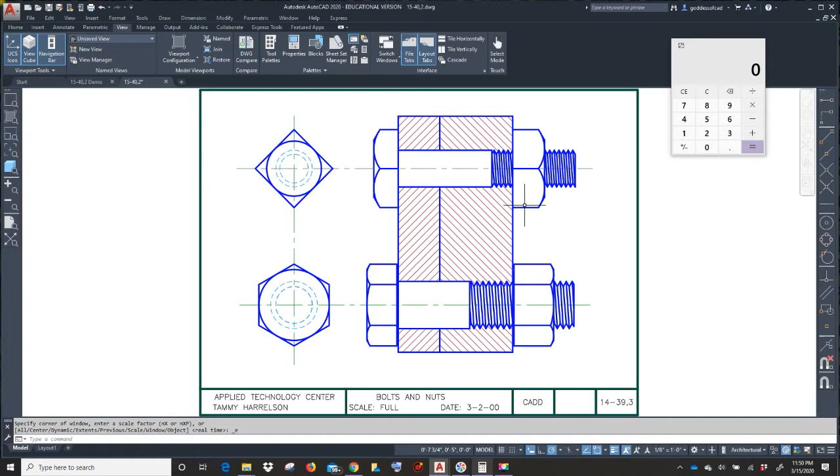Okay, this is the finished product. We're going to have to figure out the sizes, and we're going to have to figure out the different ways to create the bolt heads, the square and the hex, and we have the thread here, and the nut on the end. So we've got to do a few things with that.

We'll have a chamfer involved. We'll also have this small neck that we have to add because this is going to be a heavy hex bolt, and we will have to figure out the length of the threaded shaft and switching the angles of the hatch, because this is two separate pieces of material being bolted together.

So take a moment and get these things drawn into your drawing, and go into save and save it as 15-40 number 2. So this is our nuts and our bolts.

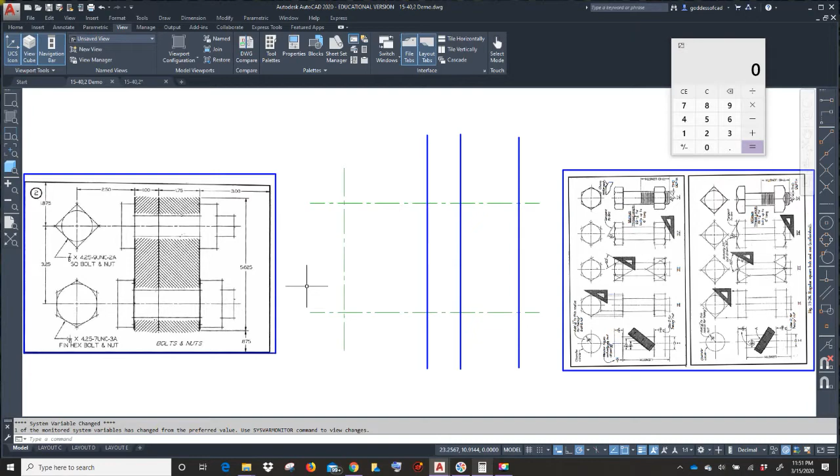Okay, what we've got to look at first is what we have going on our screen here. What is on our paper? We have a square bolt and a hex bolt.

With the square bolt, it is a 7/8, 4.25, 9 UNC 2A. So the major diameter is 7/8. The length of the bolt is 4.25, from here to the end of the bolt. It is a 9 UNC 2A thread, so there are 9 threads per inch, and the pitch would be 1/9. So the pitch of this thread is 1/9.

We have a 1 1/8, 4.25, 7 UNC 3A thread. So for this bolt, the major diameter is 1 1/8, the length of the bolt is 4.25, the number of threads per inch is 7, and the pitch would be 1/7.

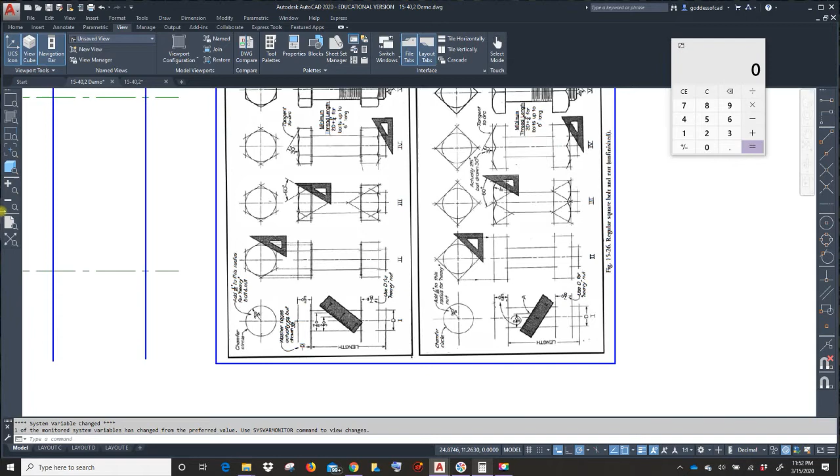Once we know those things, we need to come over to our cheat sheet and look at what we need to know. I know this is kind of upside down, but I wanted to orient the sheet in the same way that the bolt we're actually making is, so that's why it's laid on its side.

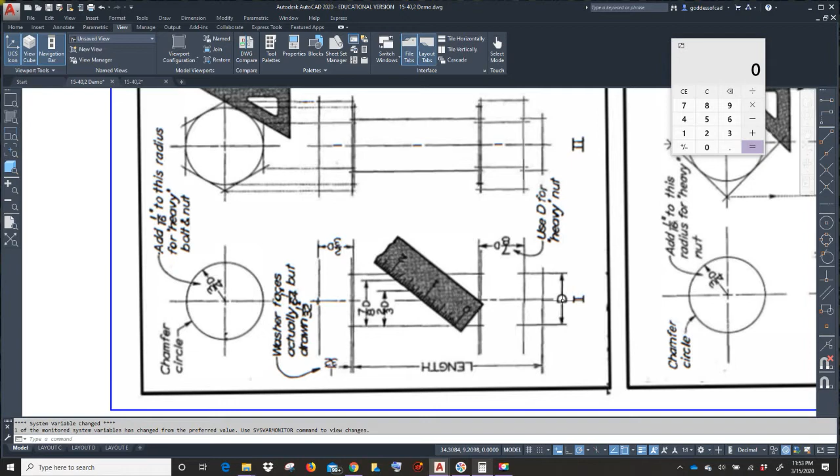We need to find our chamfer circle, which is 3/4 times D. D is our major diameter. So the major diameter of our first square bolt was what? Remember, we've got to look over here—major diameter is 7/8. So we take that 7/8 and multiply it by 3/4 in order to get this circle distance. To get the height of the bolt head, that's 2/3 D, so 2/3 times 7/8.

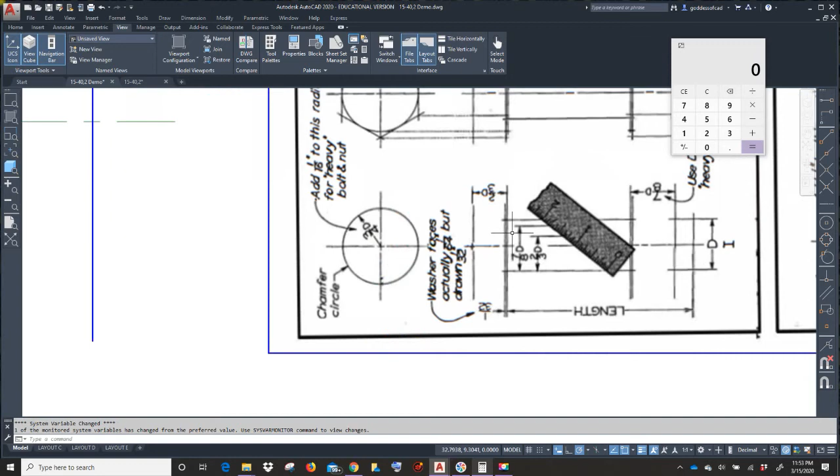So you can see when we're using this to make the different bolts, the square or the hex, you've got different measurements that you have to use to create them.

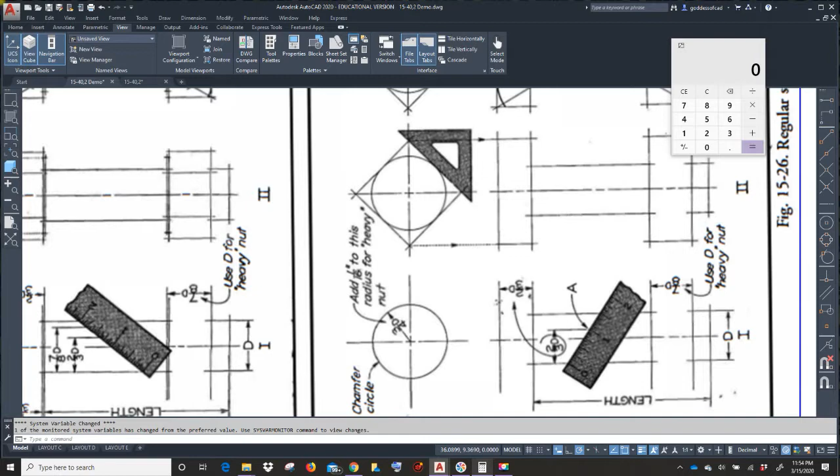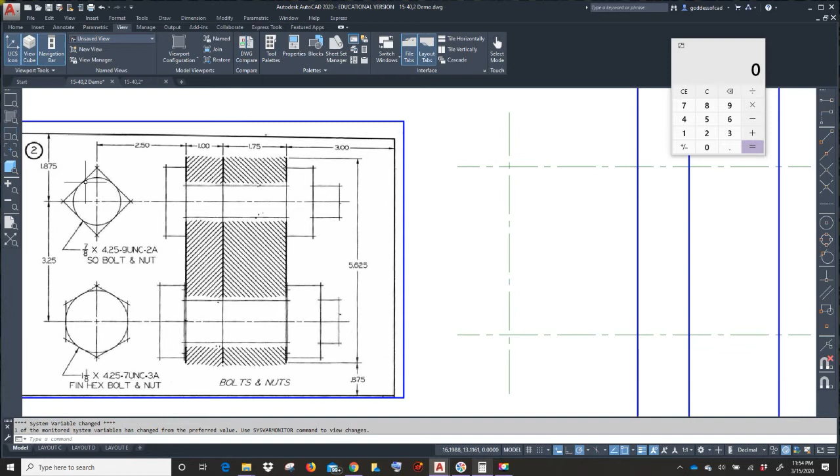Okay, so first things first, we're going to take 7/8 times 3/4 to get our square bolt chamfer circle right there. So you're going to take 7/8 times 3/4, so 0.65625. I'm going to clear that out and do it one more time to make sure I didn't have anything funky in my calculator. 0.65625.

So what you'll do, that is the radius of that circle. You're going to go to radius circle, pick your center point, put in your radius, and that is going to be that object circle. I'm going to change my current layer to object because it wasn't on object before.

Now I need to put that square around my chamfer circle. So I'm going to go down to my polar and set that to 45, so when I use my polygon command, it's going to snap in the right position. I'm going to go to polygon—it is 4 sides, there is the center, it is circumscribed. And I want it to snap to the 45 to the edge of that circle. Now we have the chamfer circle and the outside of my square bolt.

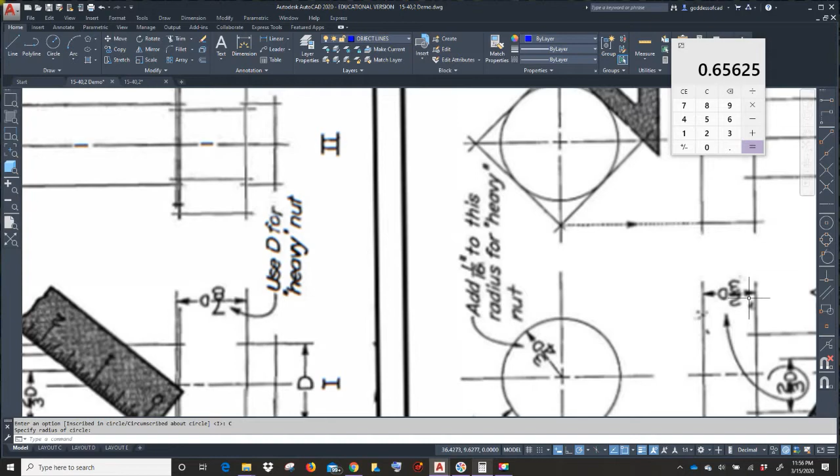Okay, so at this point, here's my square bolt. This is what I'm creating. I need this distance, so to get that distance, I take 2/3 times D.

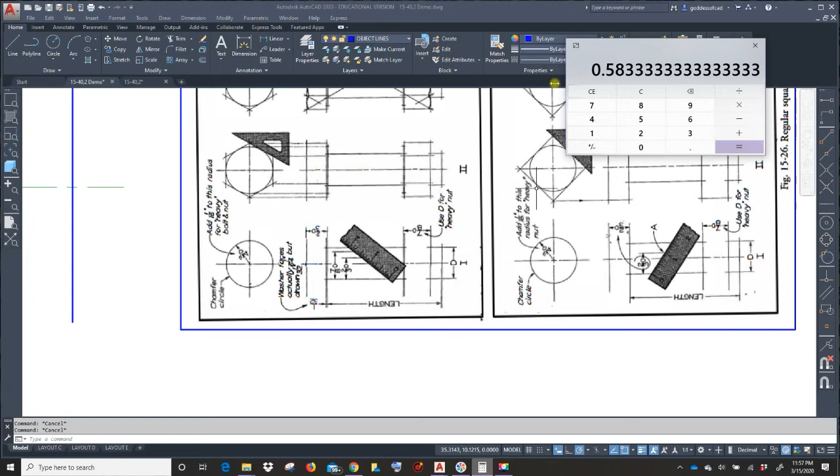So 2/3 times 0.875, and of course we are going to shorten that up, so we're just going to use 0.583.

So we're going to offset 0.583 from here to here. Then we're going to pull over the top of the bolt, the bottom of the square bolt head, and then I'm going to trim that away.

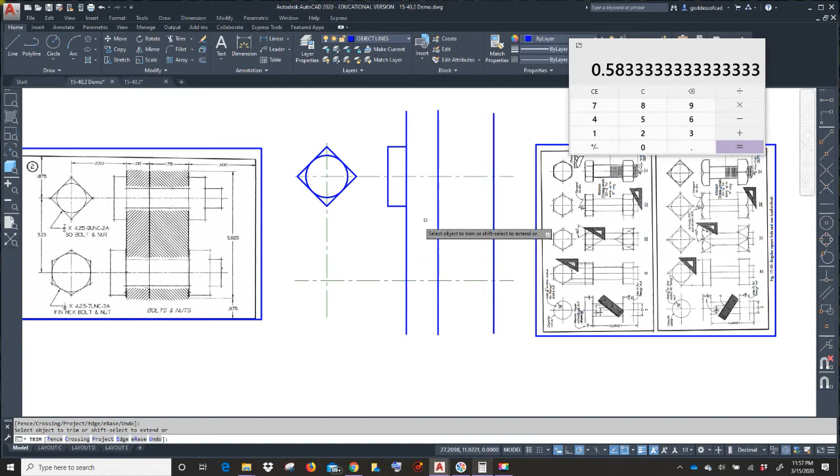Okay, now the major diameter of this thread is 7/8, so my major diameter divided by 2 is 7/16.

So now I've offset that up and down. I'm not going to change this to an object line quite yet, just because I know that I'm going to have to construct a thread in part of that.

So now I'm going to get the end of the bolt, which the length of this bolt is 4.25. So I'm going to offset 4.25 from here to here.

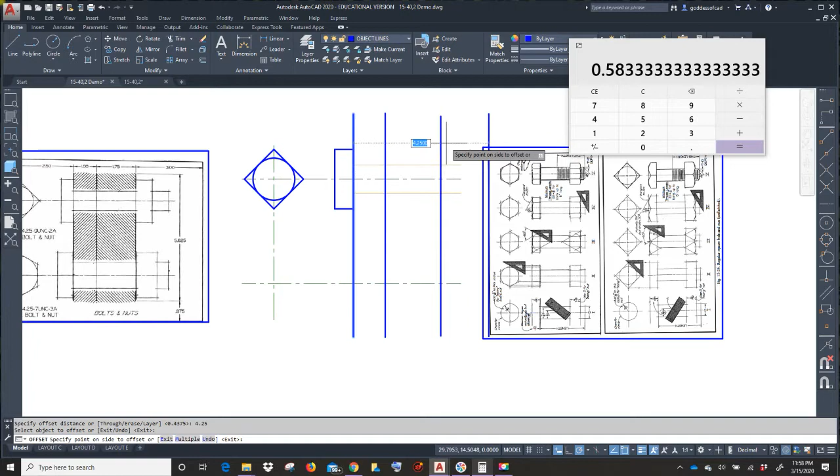Let me move my little picture over because I know that it is in the way now. Okay, I'm going to extend out to get the bolt, and I'm going to trim away what I do not need.

Okay, so I'm going to hit save at this point.

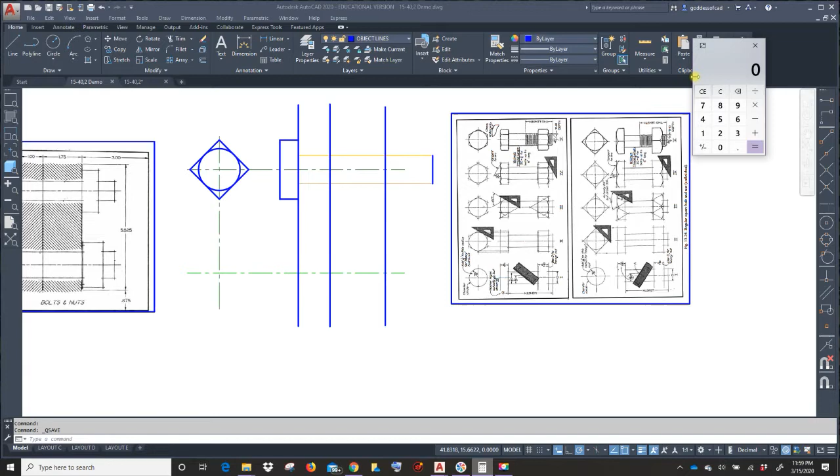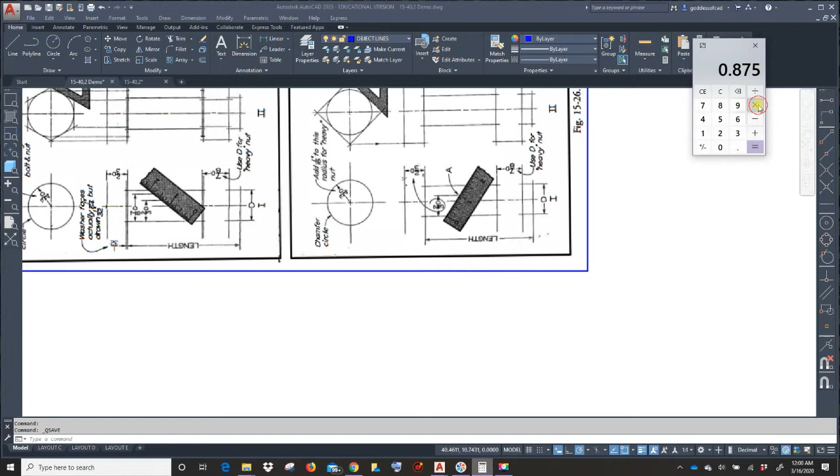So now what I need to do is get the size of the nut that is going onto that bolt. So 7/8 times D. Well, D is 7/8. So it's going to be 7/8 times 7/8, so 0.875 times 0.875.

Alright, so there's our distance. Sorry, I'm having to move it around so much. But now we're going to offset 0.765 from here to here.

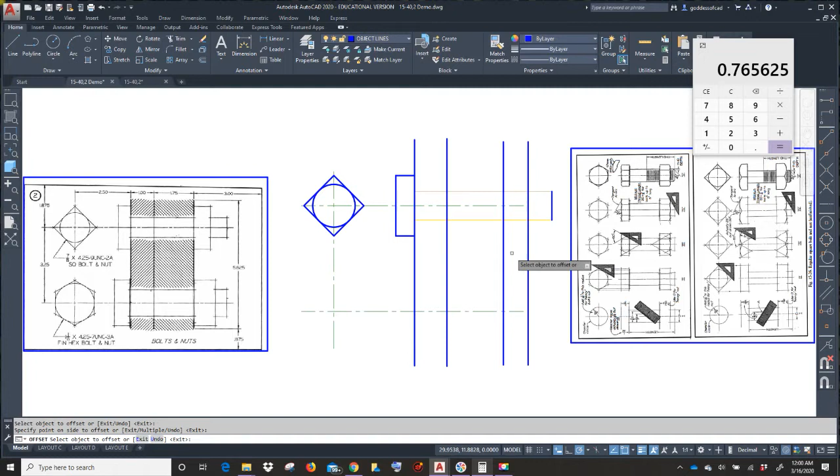You're going to pull over the same distance. And then you're going to trim off your extra.

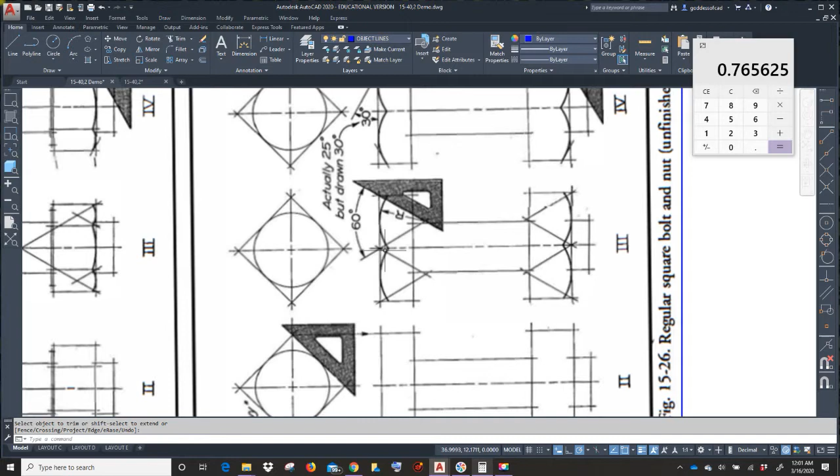Now, so we have the bolt head, we have the nut for the bolt, so now we need to create what they're going to look like. So if you see with our picture, we're going to have to create some arcs, and then we're going to have to create some chamfers. And then we will trim it out, and then we'll use our thread depth distance to understand how long that needs to be. Okay, so first things first.

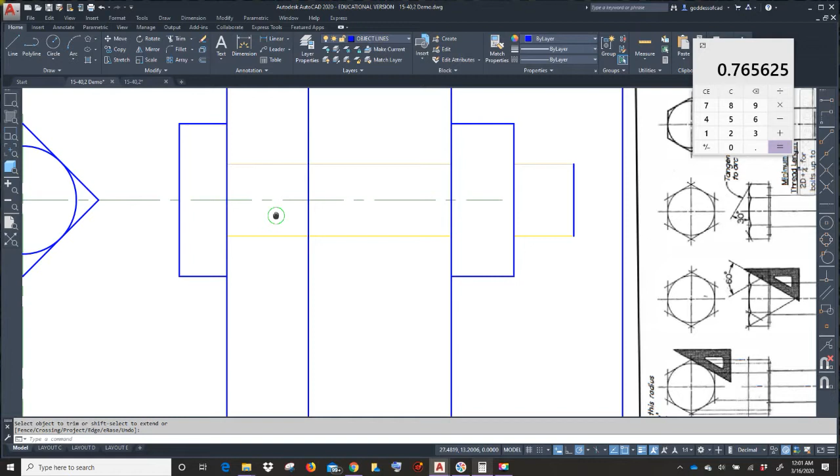Let's go ahead and pull over our object line for that thread.

Now, we need to go back to polar, and we need to set that to 30 degrees because these angles are going to form a 60. So what you're going to do is you're going to grab the corner and let this snap at 30-degree angles.

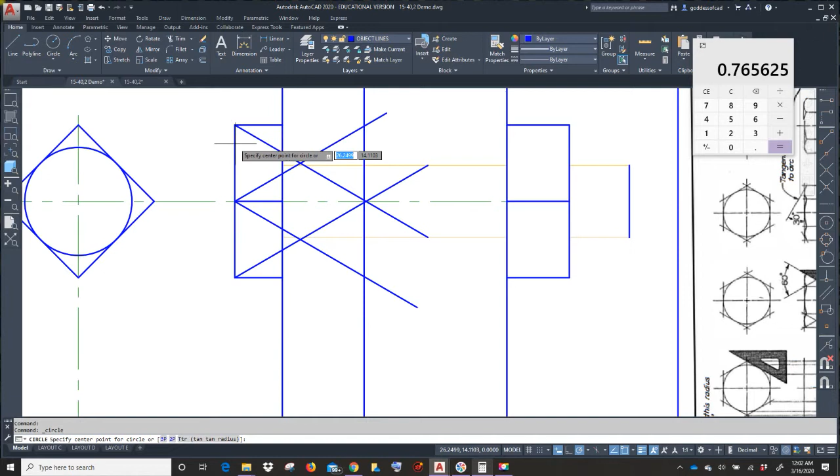Okay, so that's going to give you intersections at which to place your center point to get those curves. You're going to go to circle, center radius, and you're going to pick the intersection. Now be careful, make sure you've zoomed in and you're not picking the intersection of your major diameter. I want you to pick the intersection of those 30-degree angles. Click, and then drag it out to the edge.

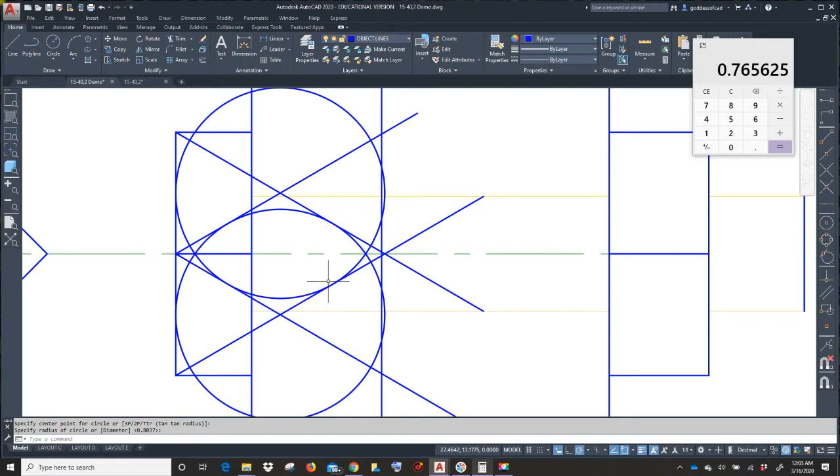Go to circle, click, drag it out to the edge. Once you get that, we got a lot going on, so we don't need these lines anymore. Once you've created those arcs, those can go away.

Now you can go to trim, and trim out the pieces. Don't forget that little line right there in the center. Then you can erase the extra.

Okay, now this has chamfers on either end. Remember, when we place lines tangent to circles, we have to manually tell it what angle we want. So what you're going to do, let's hit save at this point before we start.

You're going to go to the line command, tangent object snap, and you're going to pick the curve. So now that line's attached to that curve, so now we need to tell it how long it needs to be. So I'm going to tell it at, the at symbol, that's shift 2.

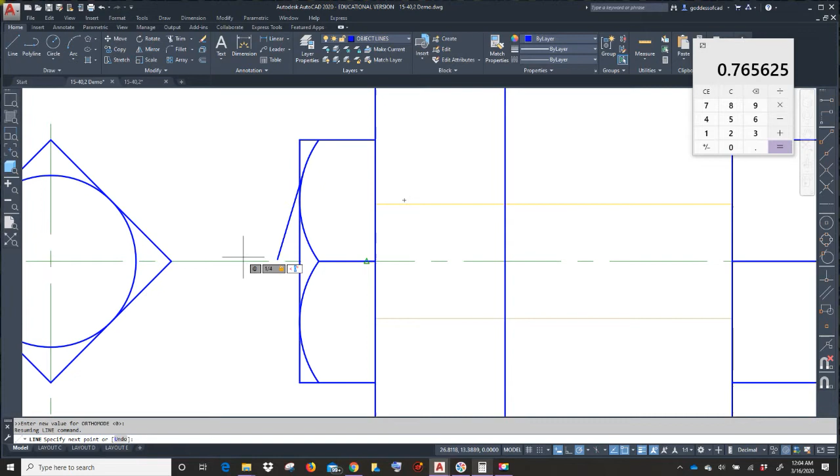This really isn't a very long line at all, so let's just tell it 1/4 of an inch. Now shift comma, and I'm going to give it an angle. Now this is at a 30-degree angle. Straight down is 270. If I back up 30 degrees, that's going to be 240. So when I hit enter, there's my line.

So that's going to give me enough. I can trim off the corner and trim off that edge.

Now the easiest thing to do at this point is go to the mirror command, pick the edge, what I want to mirror. There's my center line. Pick another point. Do I want to delete my source?

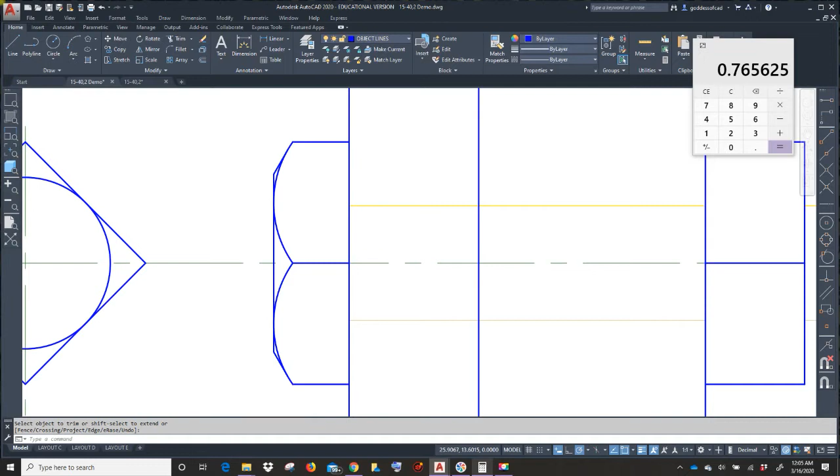No, I do not. Now I can go to trim, and I can trim off that extra circle. So there is my square bolt head.

You're going to do the exact same thing for the nut. So go to line, pick your intersections, let it snap to your 30-degree angles.

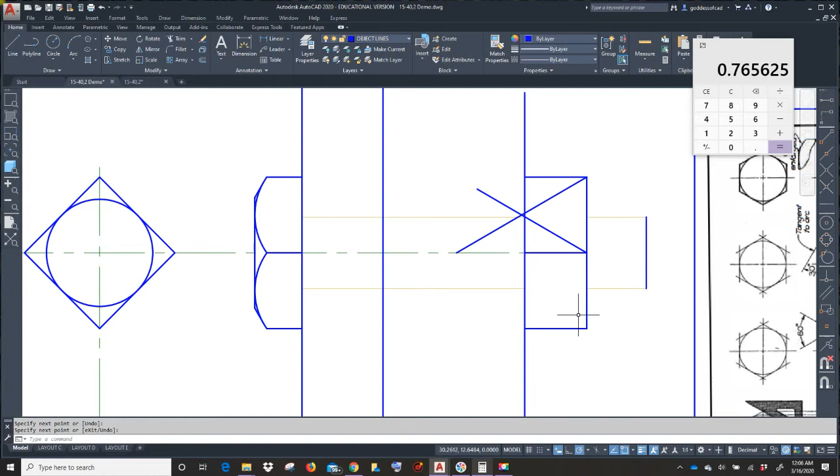There we are. Now you're going to go to circle. Make sure you go to center radius circle, and make sure you're on the right intersection. Pull your circle out to the edge, to the other side.

Okay, now to clean this up so we can see exactly what we're working on, delete the angled lines that we drew. Let's go to trim and trim off our edges.

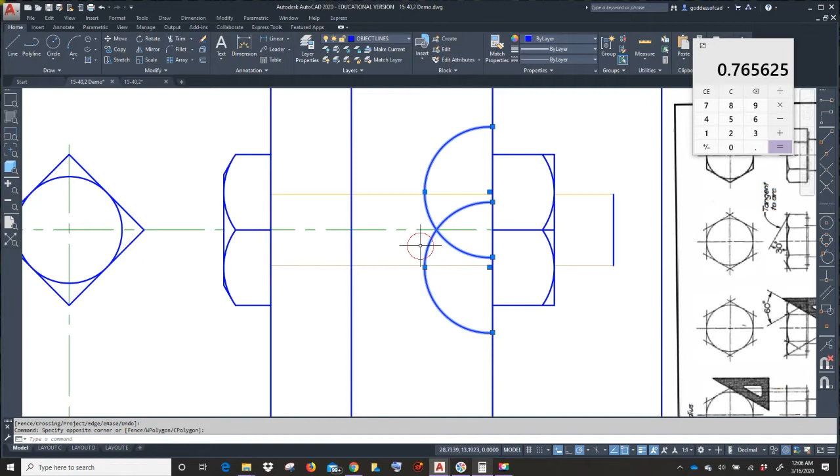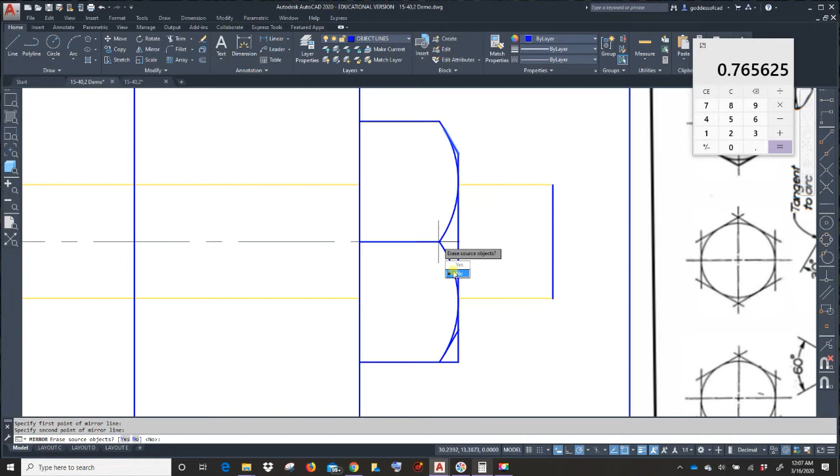Now you've got enough to trim away. Don't forget to trim our little line in the center. And now you can go to your mirror command, pick the line, right mouse click, pick the center, pick the second point of your mirror line, and no, I do not want to delete my source.

Click trim and trim off that corner, and hit save. There we go. So now you've got the bolt head and the nut.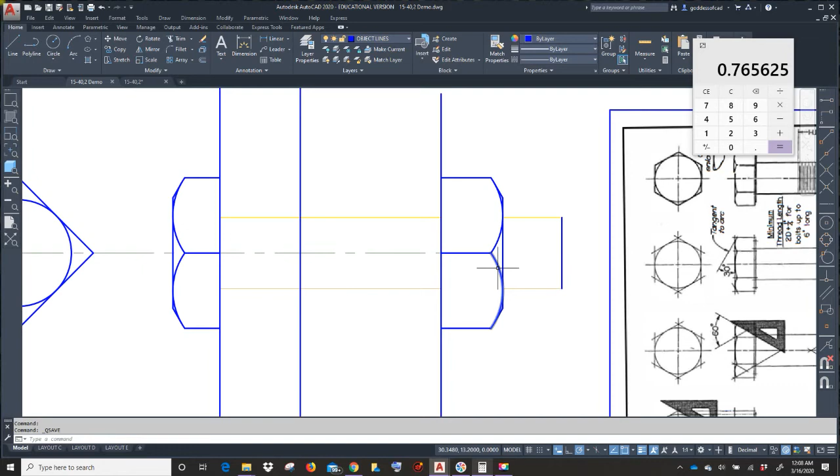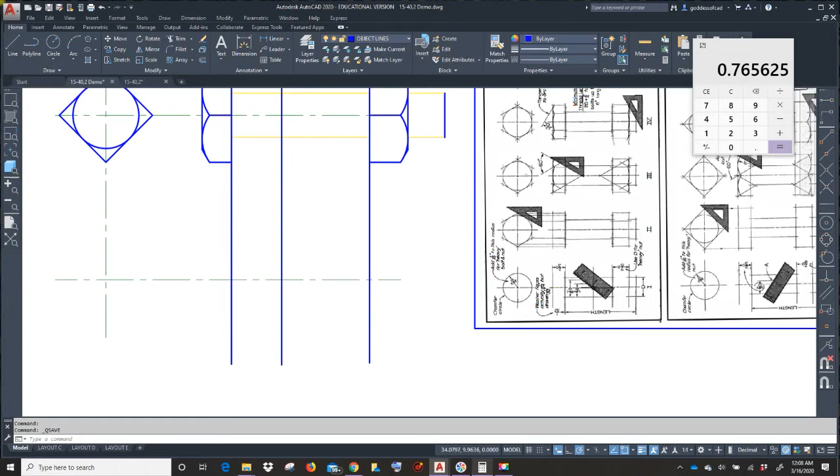Click save again. Now we're going to work on the square hex bolt, the hex bolt. We'll come back to the threads and do those at the end. So the process is pretty much the exact same. It is 2/3, 3/4, 7/8.

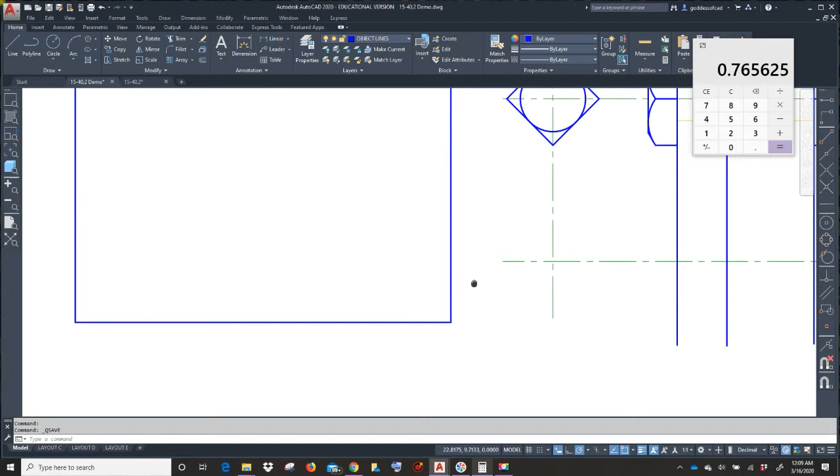So we're going to get our circle first, so 3/4 D. For our hex, 1 1/8 is our major diameter, so our major diameter is D. So we're going to take 1.125 - my calculator did not do that - 1.125, let's try that again, times 3/4. So that's going to be the radius of our circle. So go to center radius circle and type that in as your radius.

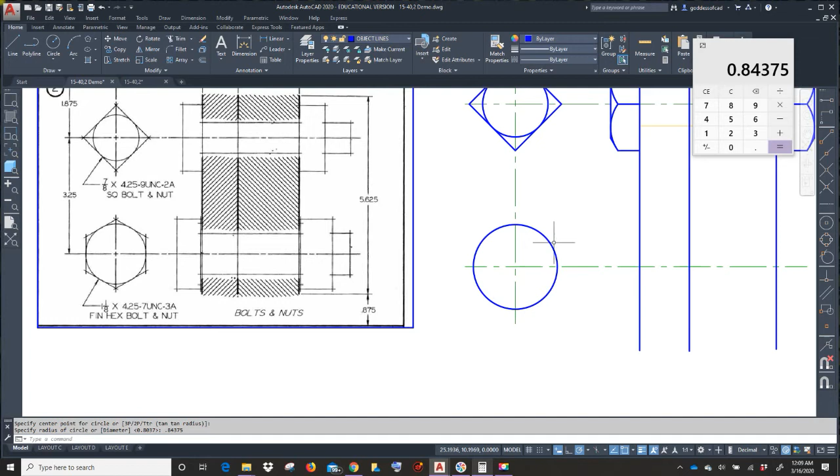And now we need to make the hexagon around the edge. So let's go to polygon. We have to change the number of sides - it has 6 sides. Pick the center point. It is circumscribed and pull it to the edge. Our polar is still set to 30, so you can let that pop to that 60-degree angle. Click, and there you have your polygon. So now we're going to pull these across, just like we did before.

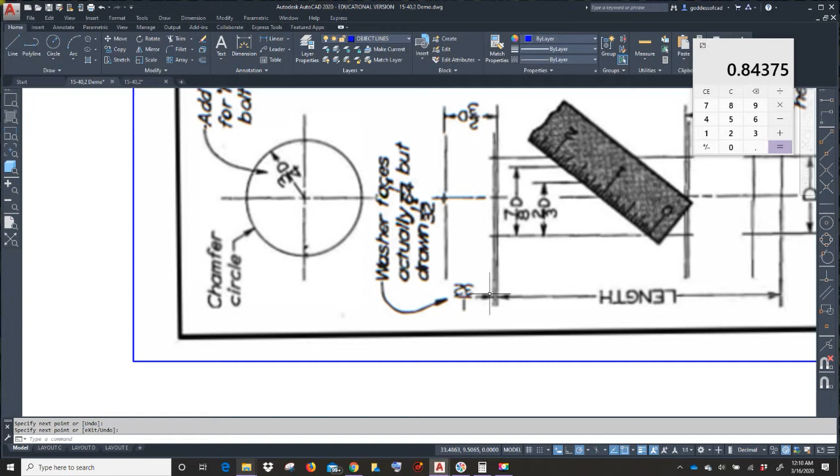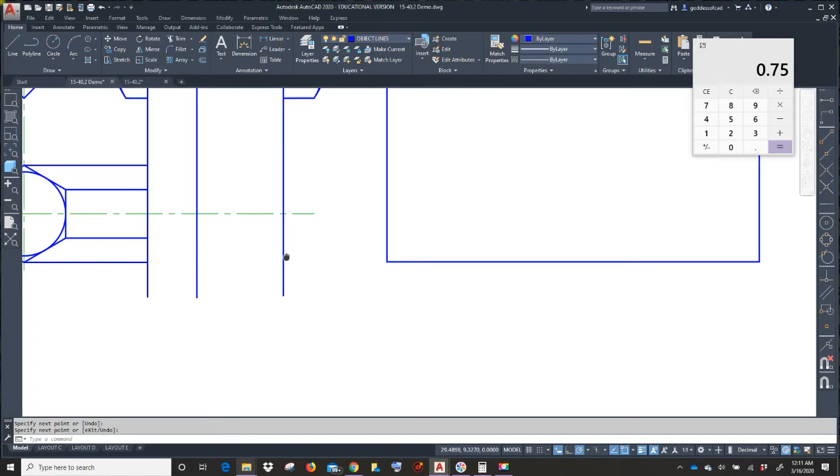Okay, now you've got to look at what's happening with this bolt head. From the base of the bolt head to the top, that distance is 2/3 D. But then we add an extra 1/32 back. So 2/3 D - we're going to take 2 divided by 3 to get 2/3, times 1.125, equals 3/4. So we're going to offset 3/4 from here forward. We can trim that off.

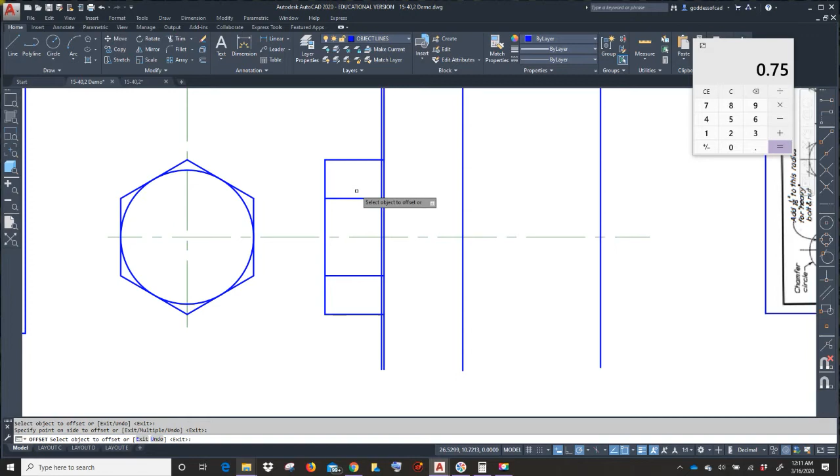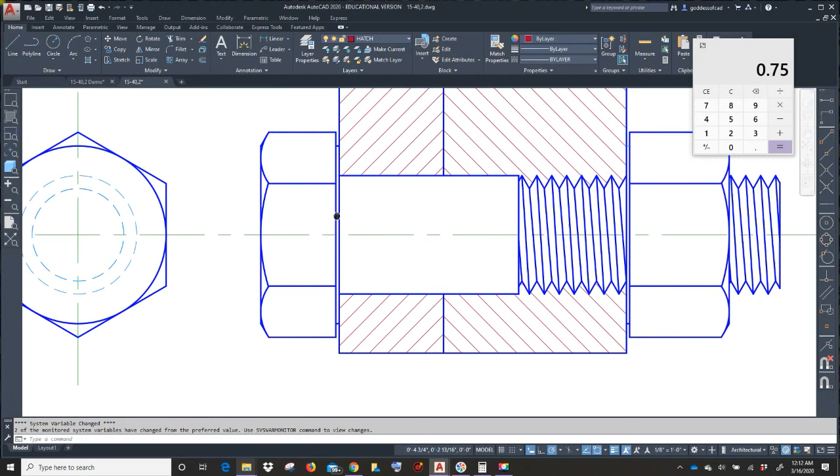Now we also need to offset 1/32. There we go. Okay, so now that we have that 1/32 - this is a heavy washer face, so that's why you have that, you want that little area in there. So what that's going to look like on your other drawing is that little space here. This distance from here to here, that is your chamfer circle.

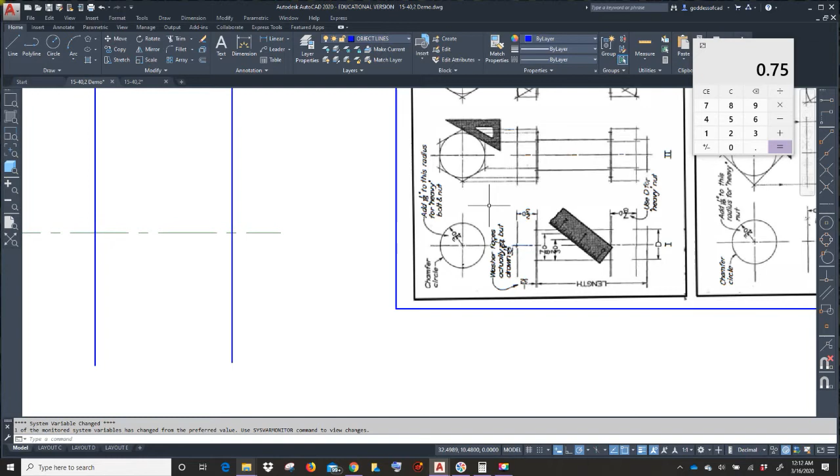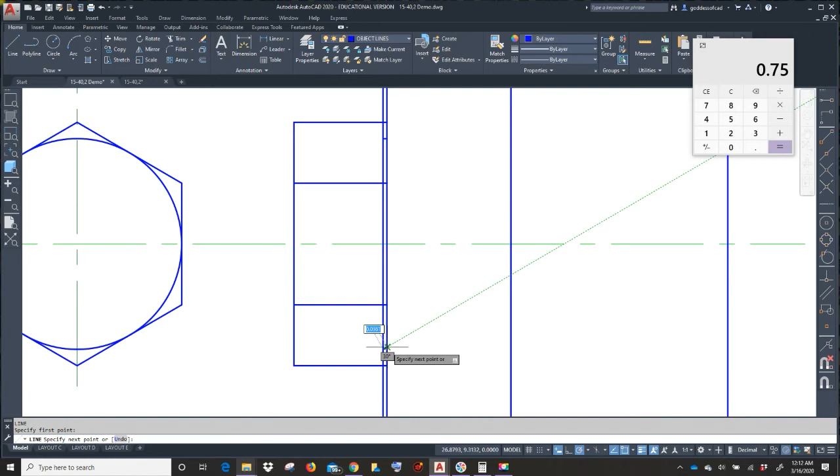So you'd pull that over to get that distance. So we're going to take that little chamfer circle, pull that over, draw in your line, chamfer circle, pull that over, and then you can start trimming things out.

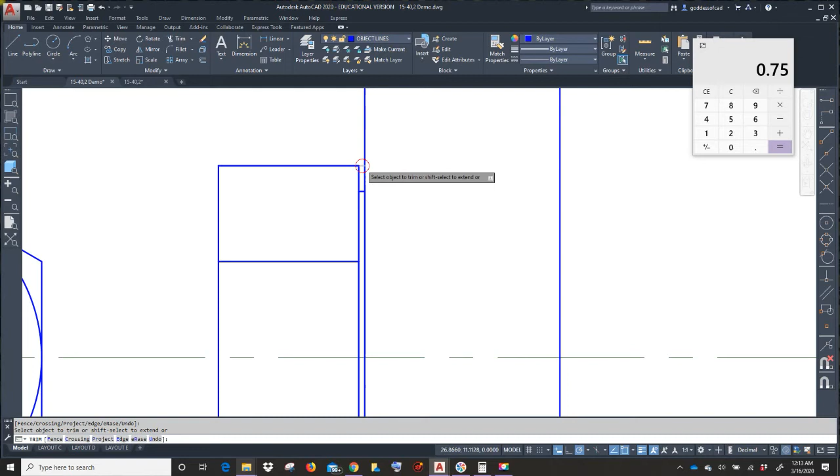Okay, so now we can offset our major diameter if you'd like. So 1 1/8 divided by 2. So we can offset major diameter up and down. Make sure we trim all the little pieces.

The bolts are the exact same size, so you can line those up at the bottom, can grip these over, and you can put those on the construction layer.

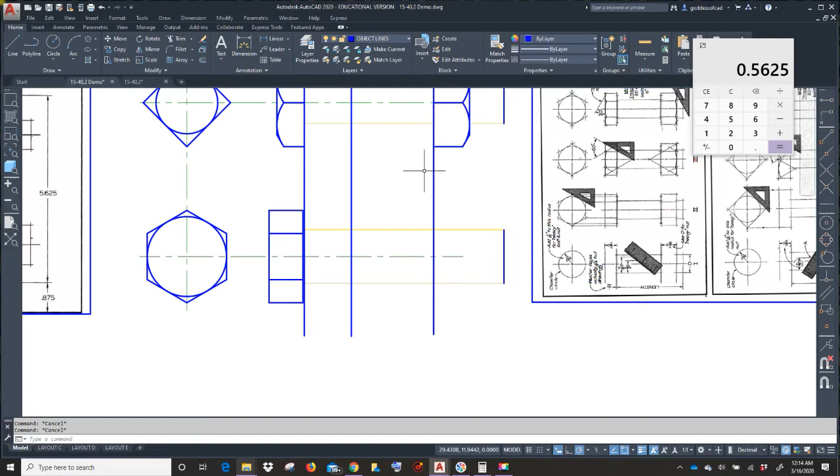All right, now these angles are a little bit different. We've got an extra section in here, so this is what you've got to do. You're creating angles here, and then here and here for the small curves.

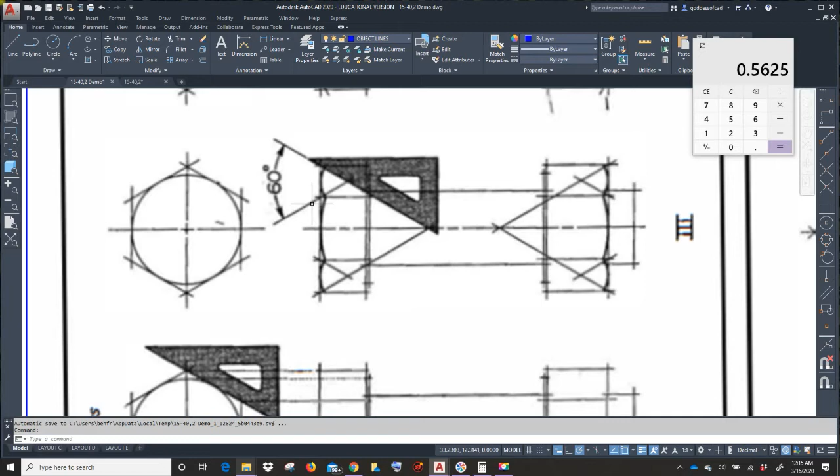Now this is what's going to happen with this. These were drawn by hand - this is how we used to construct them when we drew them on paper with pencil. So when you create this in the computer, you do not have the wiggle room that you would have with a pencil to kind of move your lead back and forth to make things touch. So when we create these curves and zoom in, they are not going to touch, and that is okay. When this prints, the thickness of our line in the ink, you'll never see it. So, that being said, all right, let's put in these angles, and I'll show you how they will not touch.

So you're going to go to line, and you're going to pull your 30 in one direction. All right, now pull it up, and then do the small ones.

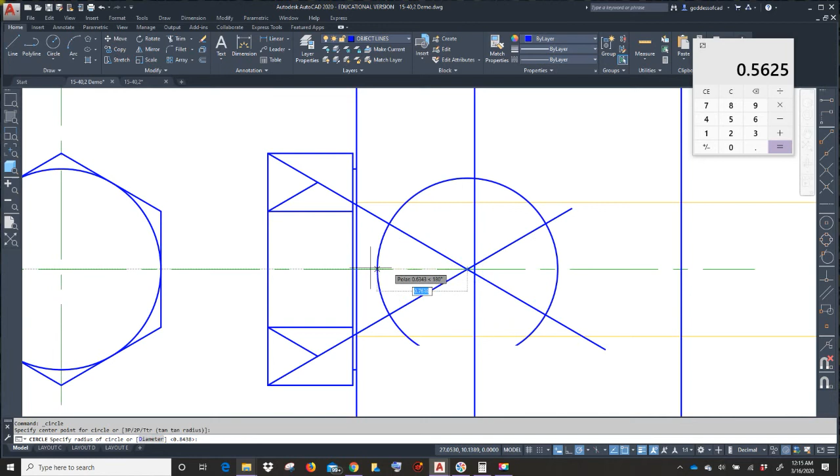Go to center radius. Make sure you're on the correct center point. Pull that circle forward. Center radius. We can erase the lines, we no longer need them. And then we can trim out what we do not need.

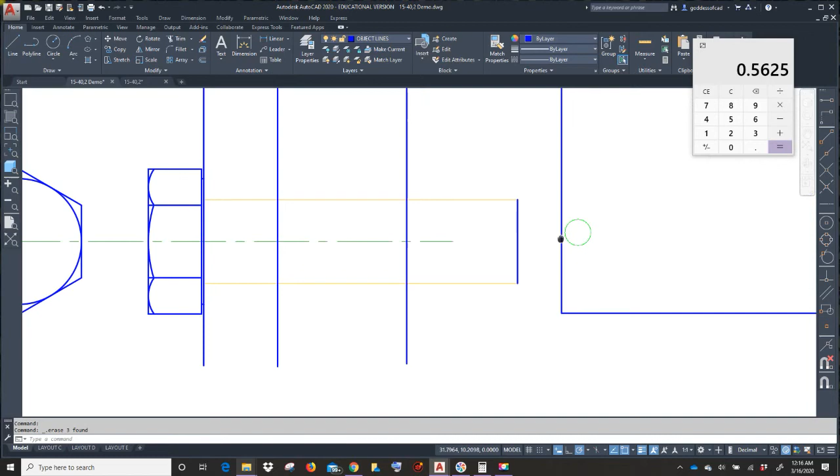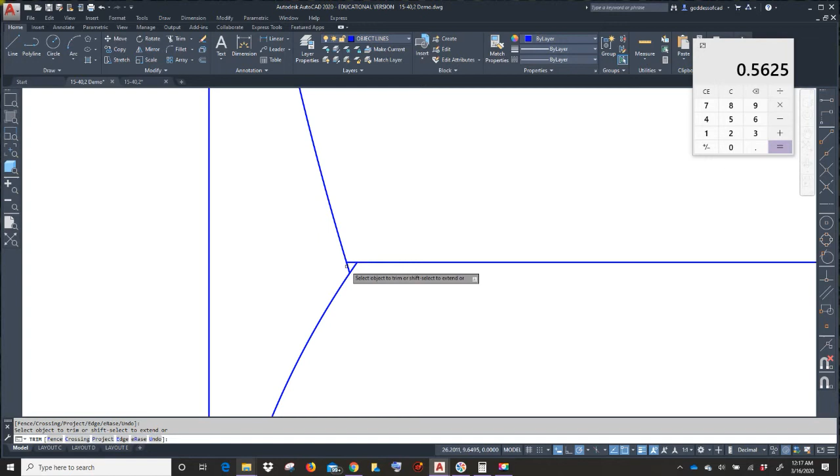So you see, it looks just like the picture, but when you zoom in, not so much. So my recommendation to you is just go ahead and trim this out and let it look like that. When you print it, you will not be able to tell - you will not be able to see it, and it looks like it touches and does everything as smooth as it can be. So now at this point, we're going to do exactly what we did up top.

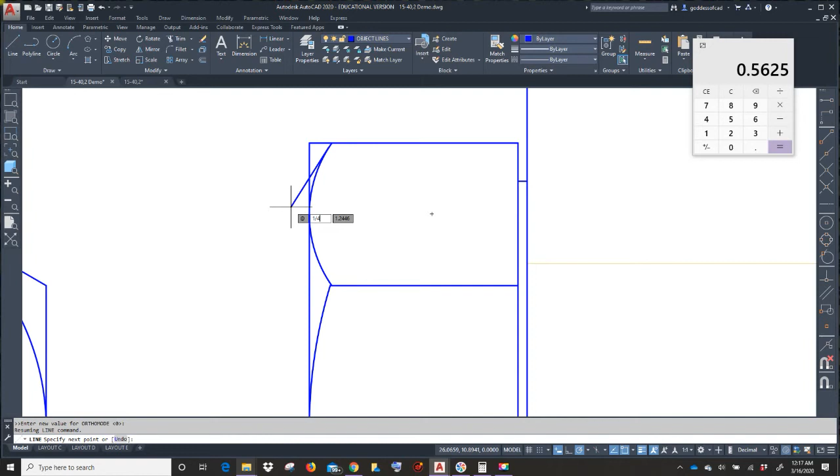We're going to have to chamfer off this edge. So you're going to go to your line command, go to tangent, pick your curve. And again, probably 1/4 is plenty long enough. So shift 2 at 1/4, shift comma, 240. Gives you plenty to trim away.

And then you can mirror it down to the other side.

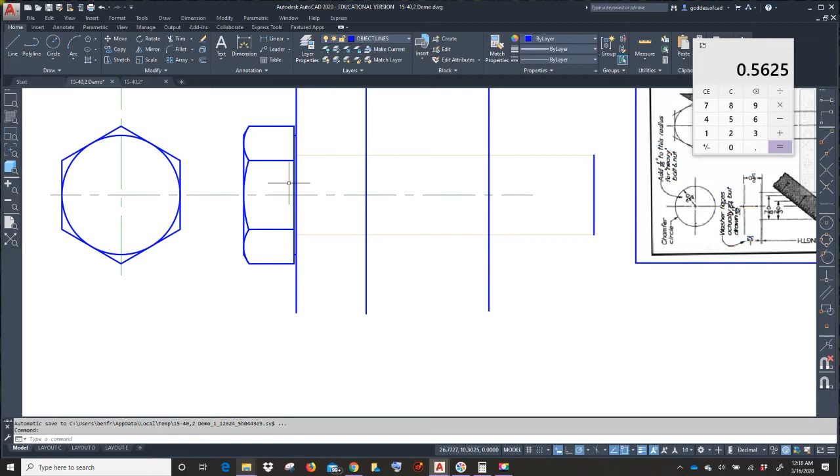Beautiful hex bolt head. Now we've got to get the nut. So 7/8 times 1 1/8. So 0.875 times 1.125. So 0.984375. That's going to be our distance for that nut.

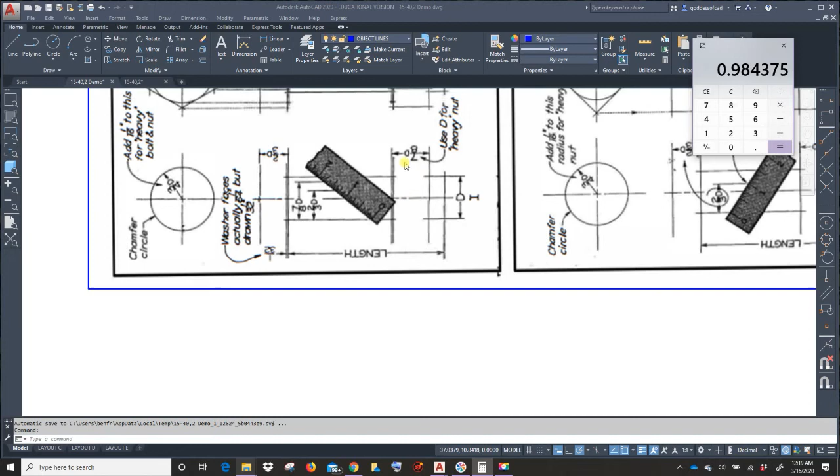So go to offset, and offset that distance out.

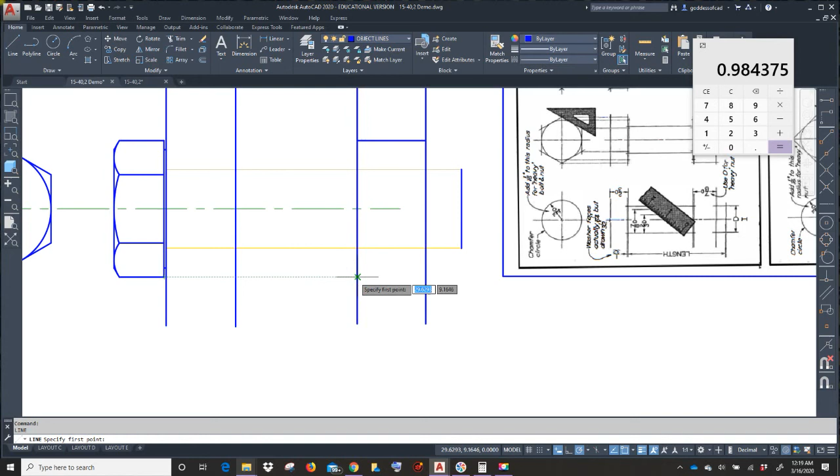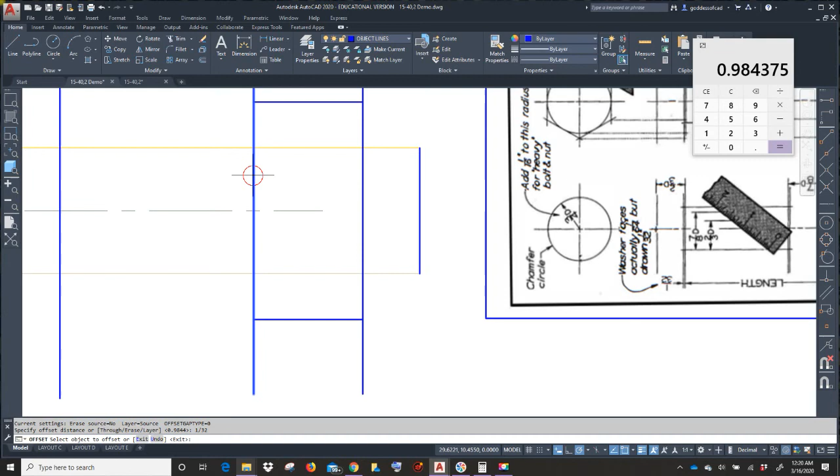Okay, again we've got spacing, the 1/32 spacing there. So you're going to go back and offset 1/32 from here to here. And then we can extend the line. You already know where it's supposed to be.

And then trim off your extra. Oops, not that line, sorry. This one.

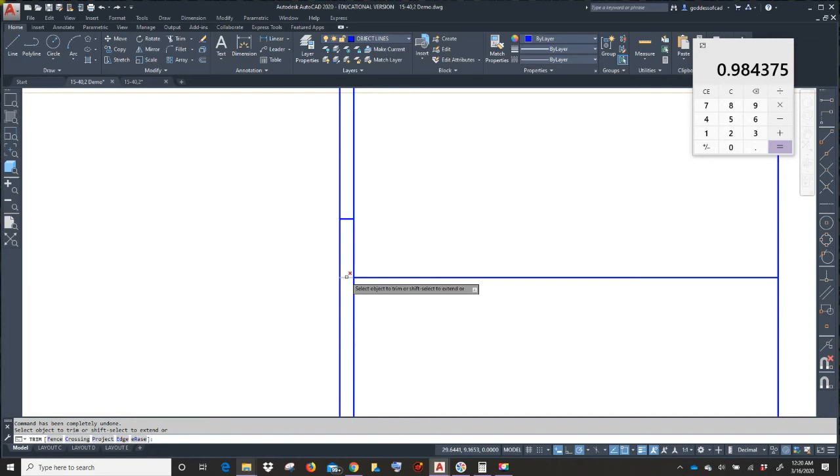Just like that. Go ahead and pull over the points of the hex.

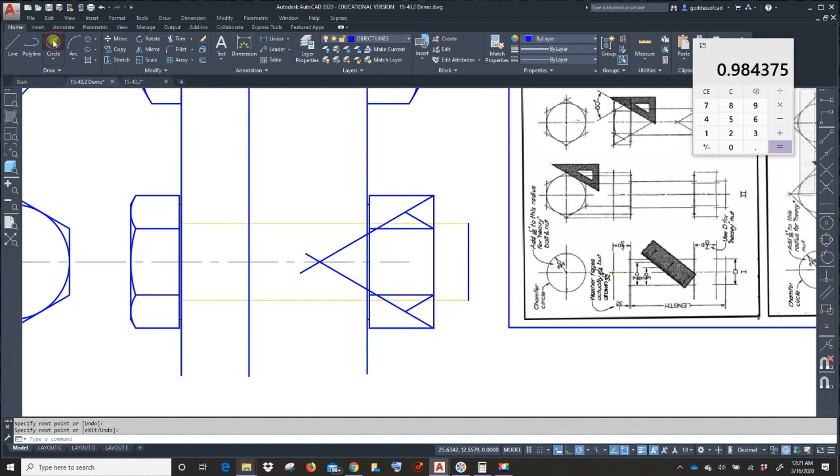And you're going to do the same exact thing and put in your curves. So remember, you do the outside corners, let those snap. Small corners, and you're going to draw in your circles.

Clean up what you do not need. And trim out your curves.

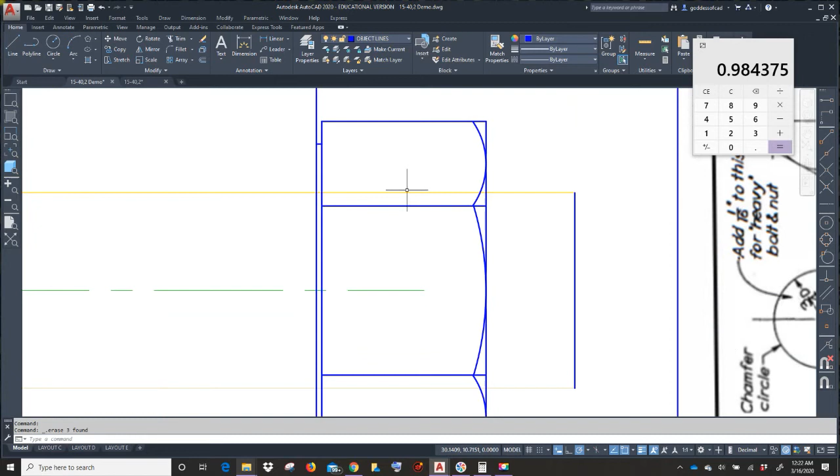Same thing on this side. It looks like it touches just fine, but not quite. So you can go in and clean that up. And then chamfer your corner.

Let's click save at this point since we haven't done that in quite a while.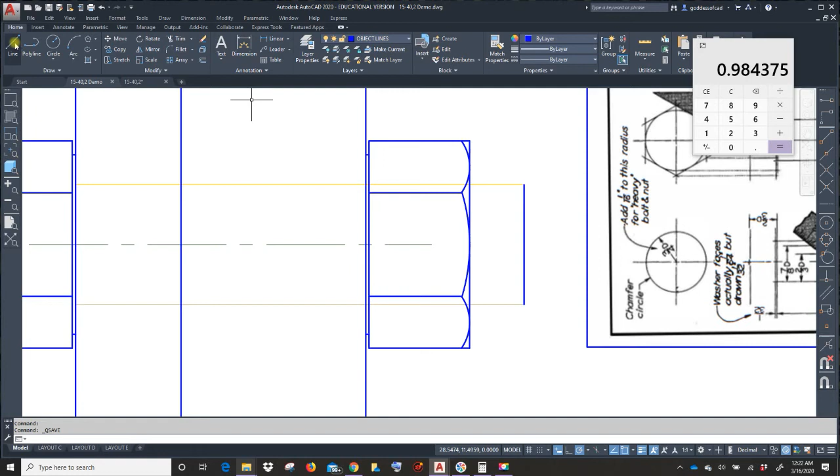Go to line, tangent, click the curve, at 1/4, shift comma, at an angle of 300.

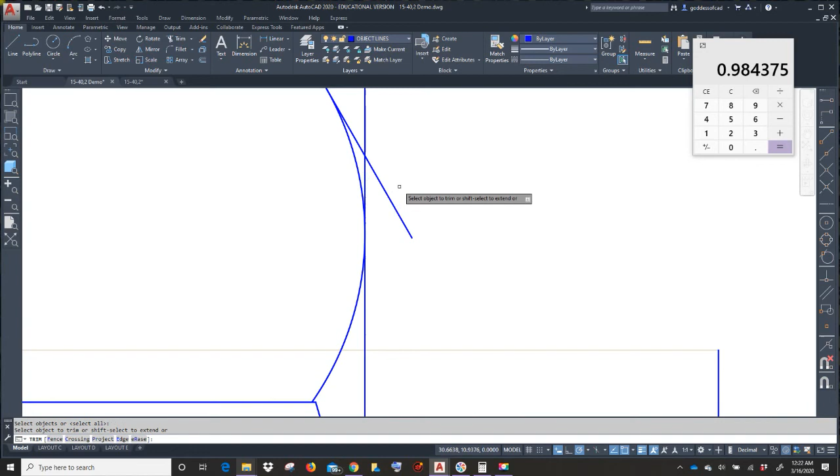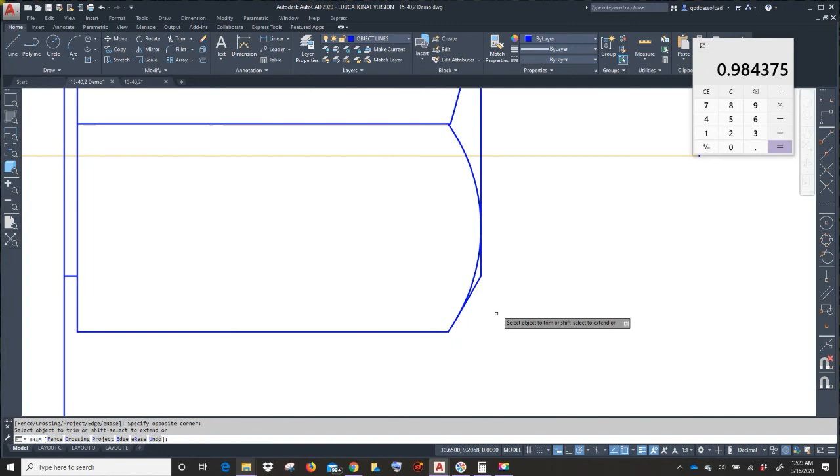Trim off the extra, and then we can just take the mirror command and pull that right down to the other side. There we go. So now let's hit save.

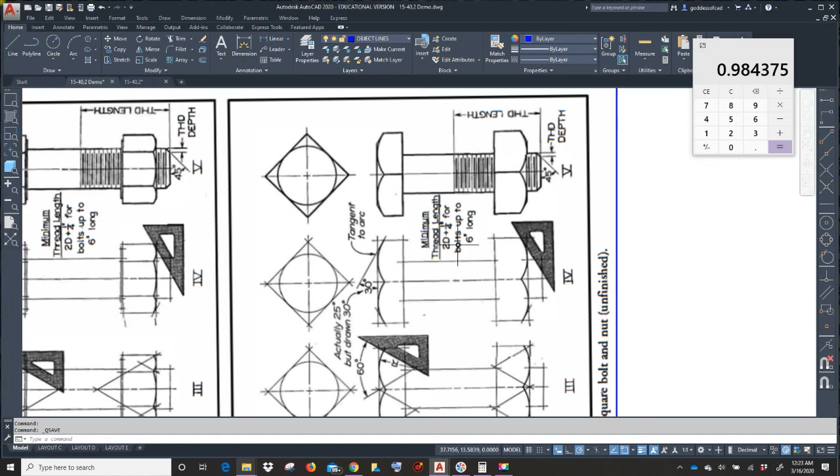All that's left to do is to thread the bolt. So you need to know the length of what to thread. Let's look right here. Thread length: up to a 6-inch long bolt, it's 2 times D plus 1/4.

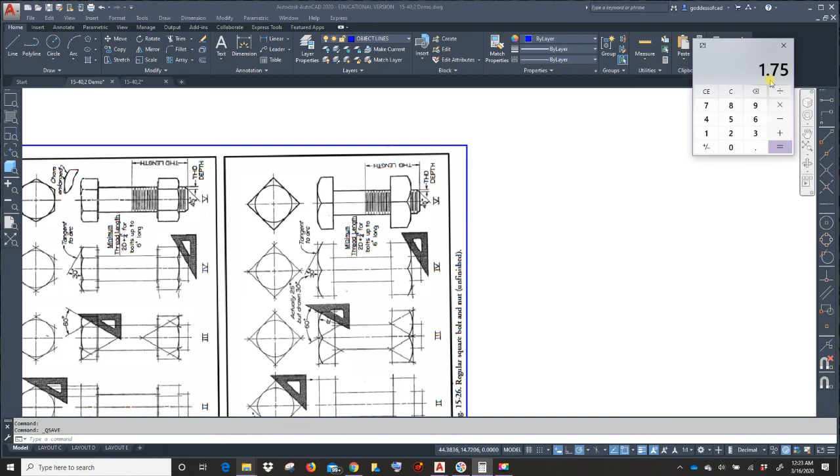Okay, so 2 times D, our first bolt is 7/8. 2 times D plus 1/4. Well, we know what that's going to be, but plus 1/4. So 2 inches is the amount of thread length.

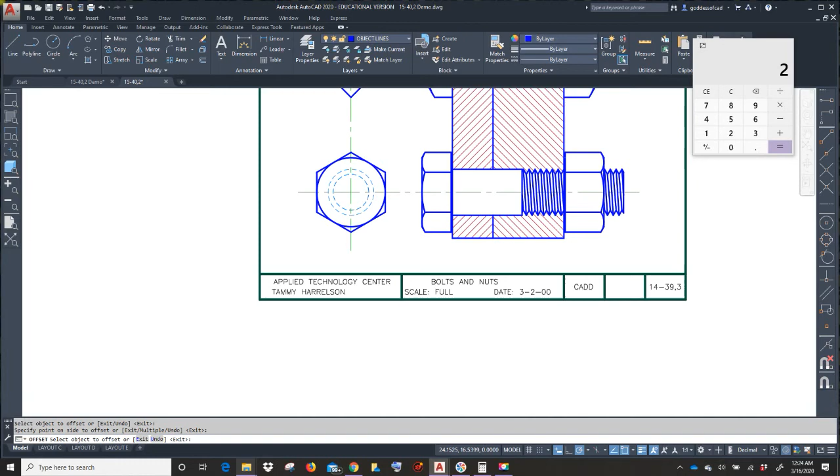Okay, so the threaded part is 2 inches. So we're going to offset from the end of the bolt 2 inches. Because you notice not all of this is threaded.

Okay, so same thing, 1 1/8, 1 1/8 times 2 plus 1/4, that's 2 1/2. So you're going to offset 2 1/2 from the end of the bolt forward.

So only this part is going to be threaded. Now, with this, you're going to have to draw the whole thread. You can't just take this piece and draw it and then copy it over here somewhere. It needs to be continuously threaded.

Now, do you have to draw the lines in here? No, absolutely not. Make your V's and then only connect where you have to, and then trim what you don't need.

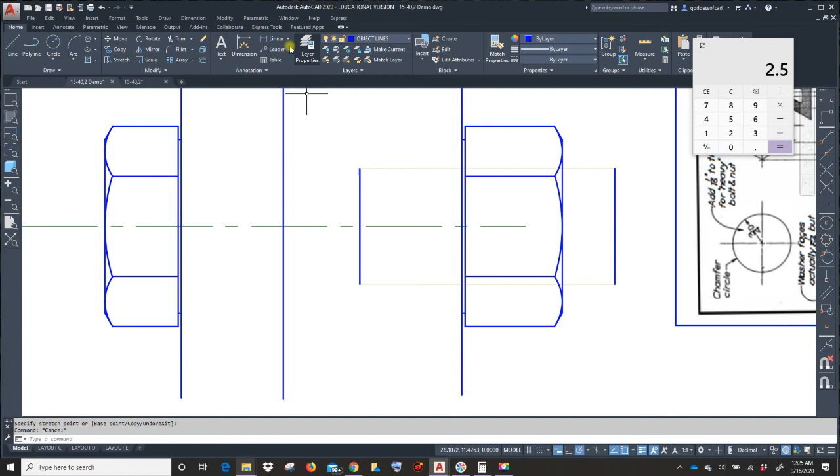You're going to convert these. These are going to be object lines from here forward, as part of your bolt.

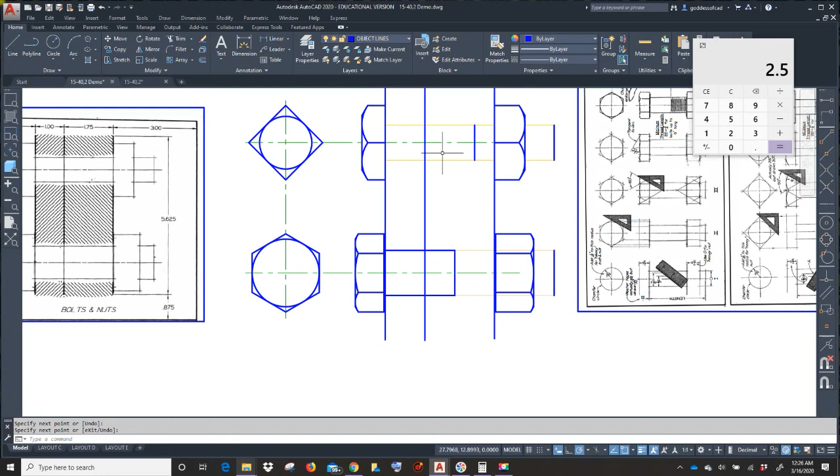Now, what I would do to create the bottom of this piece, I would say let's just offset down a 1/2 inch and let that be the bottom of our part.

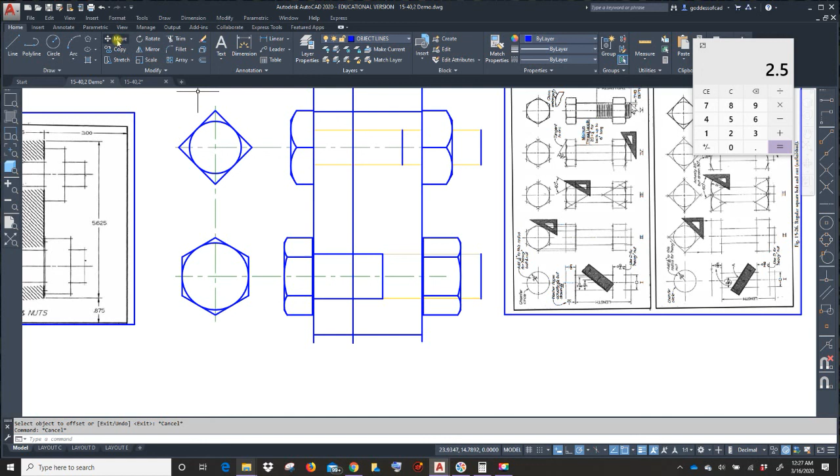And then we will offset that up to 5.625. Oh, not quite long enough. So let's move it all. Let's move that up 1/4 inch and see how that looks.

That's better. So now you can trim, and trim.

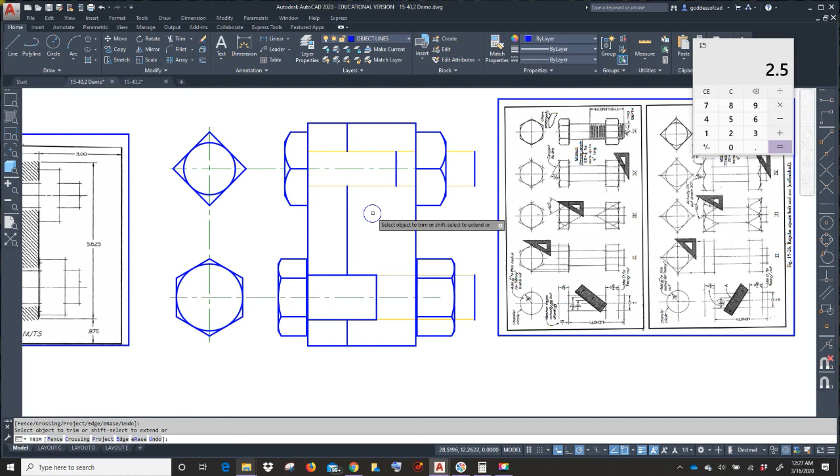So thread each bolt and then hatch each section. Hatch last. So this is your finished product.

These hidden lines, that is major diameter and minor diameter. Hidden lines here, major diameter, minor diameter.

To get the hatch to go in 2 different directions, when you pick hatch and you click into the hatch window, you can change the angle. Notice the angle is 90 on one of them and 0 on the other. So you can change the direction of the hatch.

You don't have to dimension anything. This is your finished product.

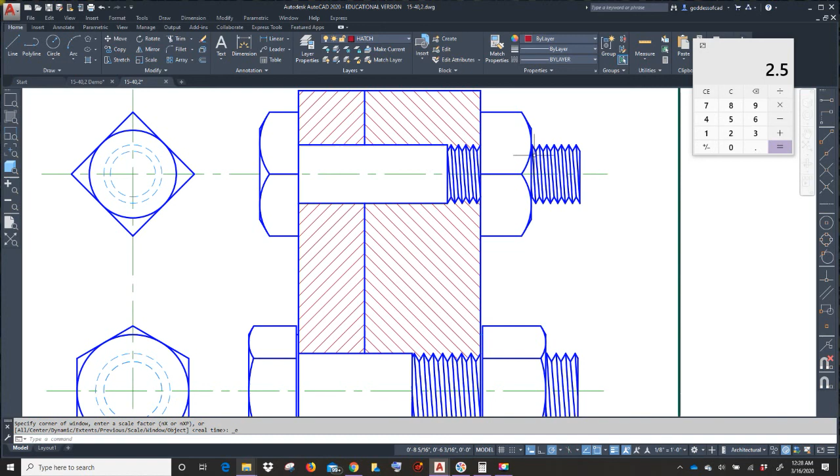Make sure you have saved often, and remember, when we get back to school and can check this, or when I check it, these don't have to line up perfectly. The threads just have to be correct and match. So make sure you've done your math correctly.